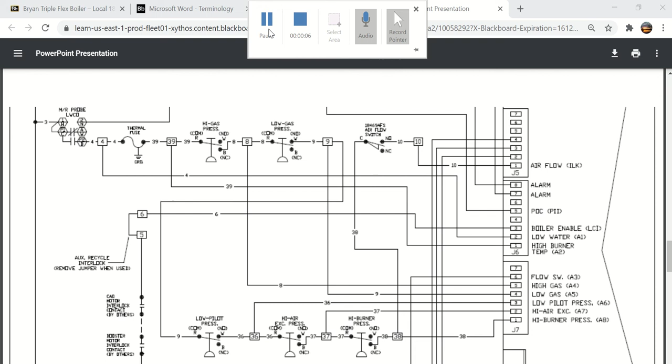Okay, so this is video 3 for quiz number 2. This should be the last of the videos for quiz 2. We left off with the manual reset low water cutoff here and how power comes down to terminal 4.

And I clicked on the Honeywell Sola information manual, and I showed you here where J62 is annunciation, and really what I meant to go to, and it probably is better information, go back to the main menu and open up the Bryan Triple Flex IOM.

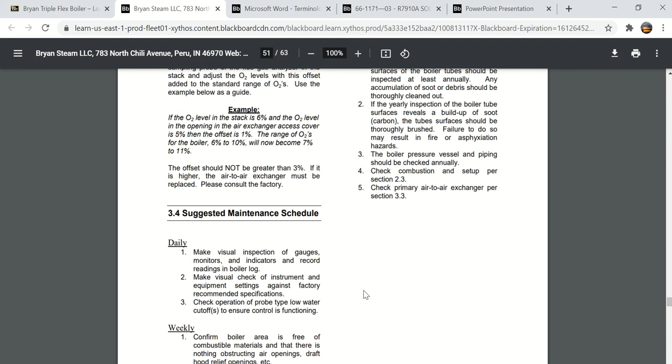And in the IOM, I'm going to go to page 40, and you will see that as I scroll through these, that not always does the page number here match up with the page number there, because obviously there's a few pages of the cover page and things that kind of screw up the difference between here and here.

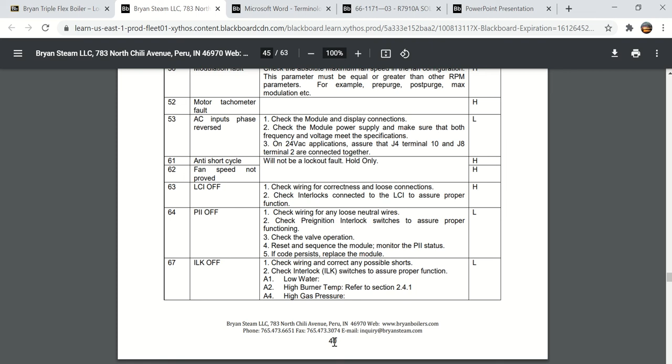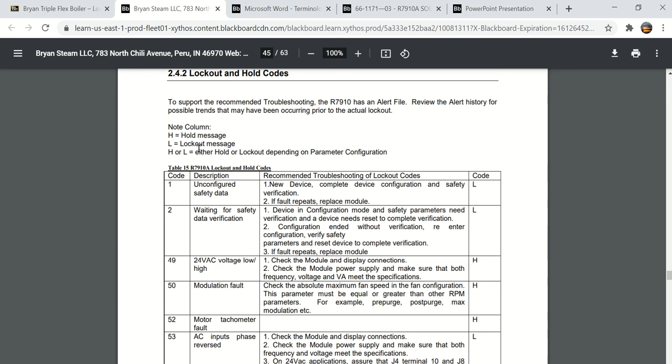But on page 40, right here where it says 40, here is a fault code, and here is lockout and hold codes. And I think this is important information that you need to know. You have a column for whether it's a hold message, which means that the boiler is going to wait until, or the sequence is going to wait until it sees something happen before it goes on, or if it's a lockout. And you come down here, you'll see code 67 ILK interlock off.

And it tells you if you have one of these issues, you need to check the wiring or check the interlock switch to assure proper function. And when they're talking about interlock switch, talking about things like the low water cutoff, the high burner temperature, which is the next thing in the series circuit that we're going to look at, and then high gas pressure. But you can see that is a lockout.

And the important thing to know is that if that low water cutoff locks out, it would tell you you have a code 67 interlock off, and it would tell you that it's an A1 low water. You have to go to the low water cutoff, and you have to press the reset button on the low water cutoff. Once it's reset, then you have to push reset on the touchscreen because it also has to be reset.

And that's kind of redundant, but that's what you'll see. A lot of the controllers are manual reset. When they cause an alarm, you not only have to reset it at the device, which in this case would be a low water cutoff, you also have to reset at the screen.

So it's important to know that when it goes to A1, which is that terminal J62, I believe it was, that's what it's looking for, and that's what it will do is cause it to lock out. And you'll see there's several A terminals, and we'll get to all those.

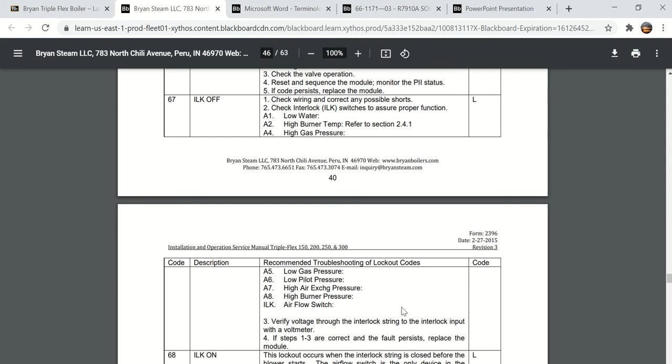So getting back to the wiring diagram here, the next thing in the series circuit, once we get power through the low water cutoff, we know we have water in the boiler, is the thermal fuse. The thermal fuse is used to protect the burner. If the burner gets a crack in it, if it gets warped, if for some reason the air-fuel mixture that's on the inside of the burner gets hot over a certain temperature, that thermal fuse will break, and it is a one-time fuse, or thermal cutout, just like a fuse.

Once it breaks, it's gone. You have to replace it, and if you called Bryan to tell them you needed a new one, they would also want to sell you a new burner, because obviously something has happened to the burner.

When you think about this type of a boiler, you're taking forced air and fuel under pressure, and you're mixing it and pushing it into a cone that is designed to allow the flame to burn on the outside of the cone, the mesh screen. If it burns on the inside, there's a problem. So this thermal fuse is actually set inside the air-fuel mixture inside the burner cone itself.

Once you know that you have a good thermal fuse, you would have power from 4 to terminal 39. Terminal 39 has two other connections, and one of them comes down here, and that is the high burner temperature, or the A2 input. So this is another input, J61, that the boiler looks at, and it monitors the power there. If it sees that there is power on terminal number 2, that means that we've got power here after the low water cutoff.

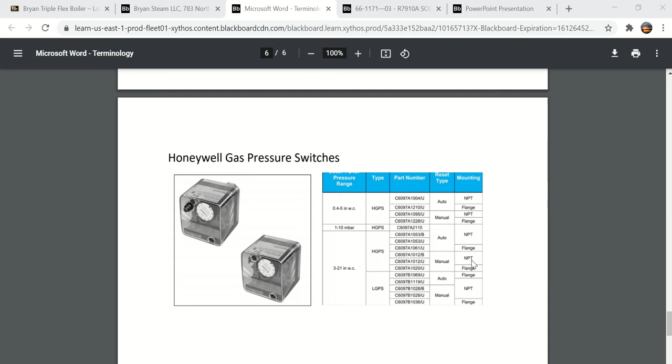Okay, looking back at the wiring diagram, here's the high gas pressure switch, and we know that if we have high gas pressure at wherever this is located, there's going to be a problem, and we're going to get the annunciation. We're going to have to reset that. So it's kind of important to know exactly where this is at.

And what I want to go to now, you go back to the main menu, and you can see I still have all these other things open up here. I'm going to go back, and I'm going to look at the Bryan Triple Flex IOM, and I'm going to scroll down to page 17.

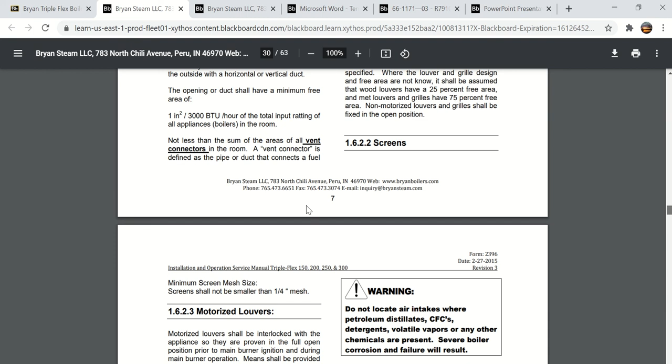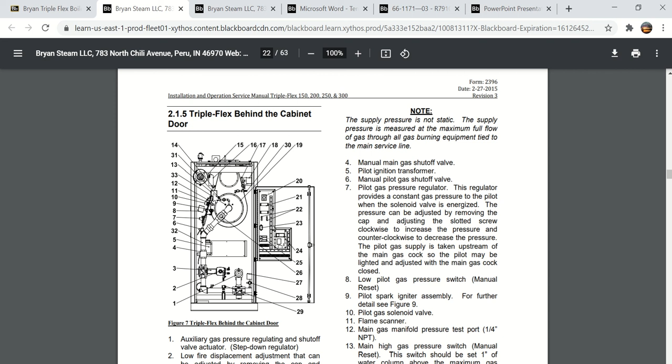Gas train comes in right here, goes up, goes into the burner. This right over in here is the pilot gas line. There's a pressure tap. There's a pressure switch there. There's another pressure switch here. But let's take a look at where the high gas pressure switch is located. It should be right up here. So I'm going to guess maybe number 33.

So you scroll down and you look at all of these devices. There's a main low gas pressure switch, high burner.

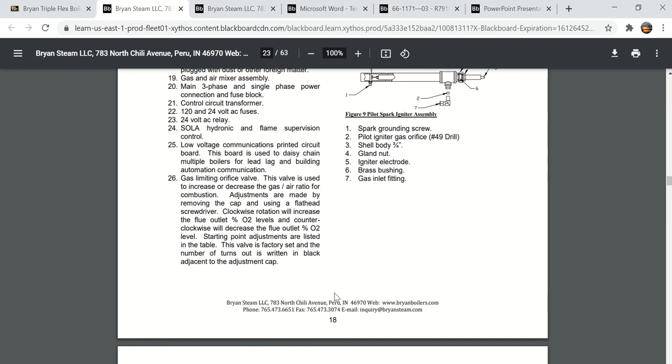And I was looking for the high gas pressure switch. Maybe it's pilot gas pressure switch. Here it is. Main high gas pressure switch is number 13, pointing right to that right there. So number 13, main high gas pressure switch, manual reset. This switch should be set at 1 inch of water column above the maximum gas manifold pressure.

So you look at a table, it'll tell you what the maximum gas manifold pressure is, and then you would typically set that switch 1 inch higher so that if the maximum gas pressure was exceeded by 1 inch, it would trip. But this is kind of how you will see where these components are located.

Obviously, if you've got the door closed and you're looking at the touchscreen and you get an alarm that says high gas pressure, you want to be able to open the door and go right to the proper switch and push the reset button. But then after you push the reset button, obviously you want to figure out why that happened. So being able to identify these is kind of important.

So I have a few minutes left on this video. I want to go through the safety circuit here with the rest of the pressure switches. So here was the high gas pressure switch. Here's the low gas pressure switch. If you turn the gas off to the boiler and turn it back on, if the gas pressure bleeds off or you lose gas pressure for any reason, somebody shuts off gas to the building, this is a manual reset low gas pressure switch. You'll have to reset it.

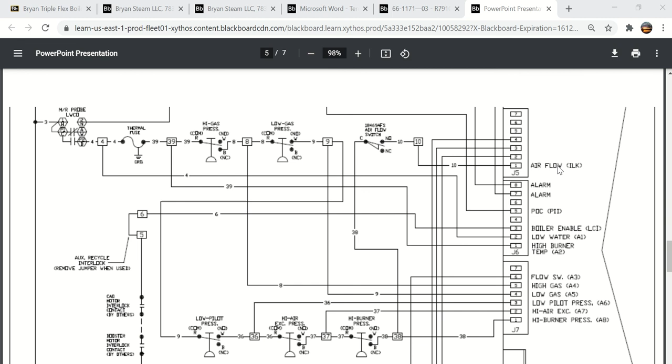Okay, just a couple of minutes left on this video. So here is page 35 of the Bryan IOM, and this is really important. Here is pressure settings for all those switches that we just looked at. High gas, low pilot, high burner pressure, high heat exchanger pressure.

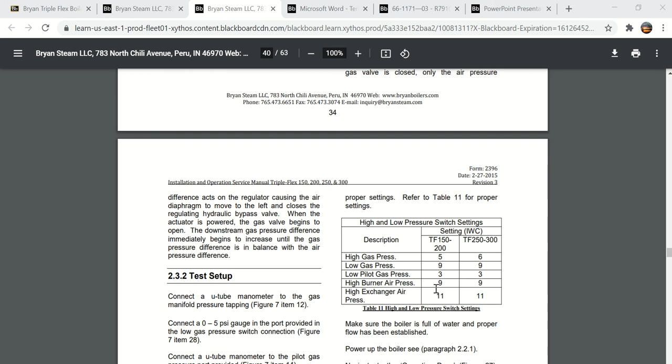You know, I'm going to put some of these on the quiz. If it's a TF 150 through 200, if it's a TF 250 through 300, what are the settings? You can see they're pretty much the same. So you may see that on there. Make sure you know how to get to the IOM, page 35. But before I run out of time here, let's go back up to the picture of the front door.

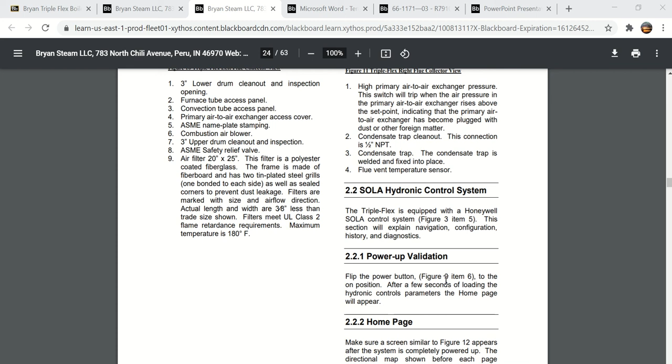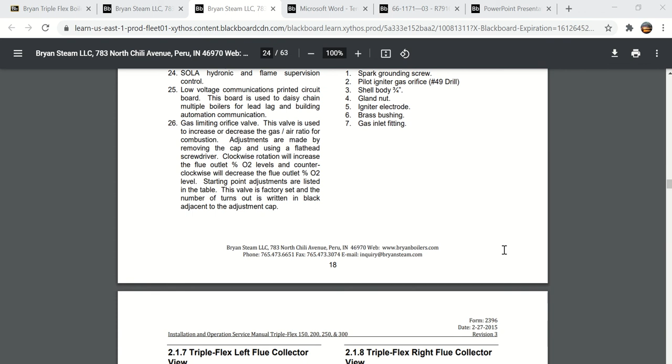Right here, this is where you saw the low gas pressure switch and the piping. But if you scroll down, here is the airflow switch, picture of the actual airflow switch. And you scroll down to page 19 here. I can get it to stop for me. Here is the side view of the boiler. There's a filter rack here. There's a filter where the air comes in.

Air comes through here. And here is the actual blower. The blower has an intake right there, so it's pulling air across the top of the boiler, forces air down through this air-to-air heat exchanger. Right here, number one, is your air heat exchanger pressure switch. Air goes through this heat exchanger before it goes up and into this tube that goes all the way up front and goes to the burner.

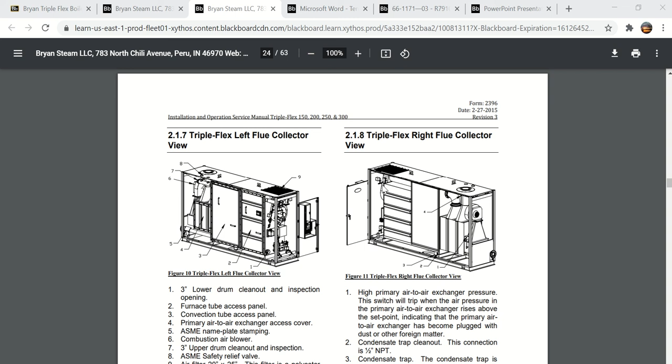Now the flue gases come through, and they go through that air-to-air heat exchanger and out the flue exhaust, which is right here. So you're preheating the air before it gets to the burner section by running it through an air-to-air heat exchanger, heating it up with the flue gas.